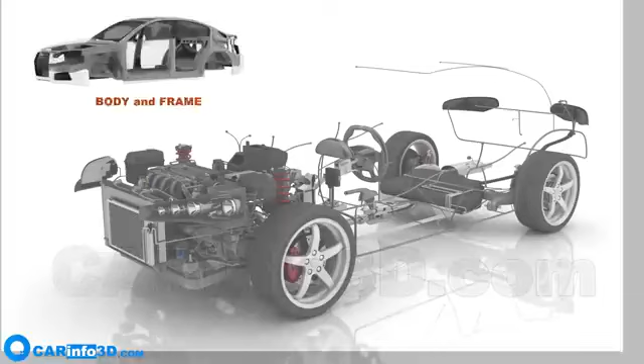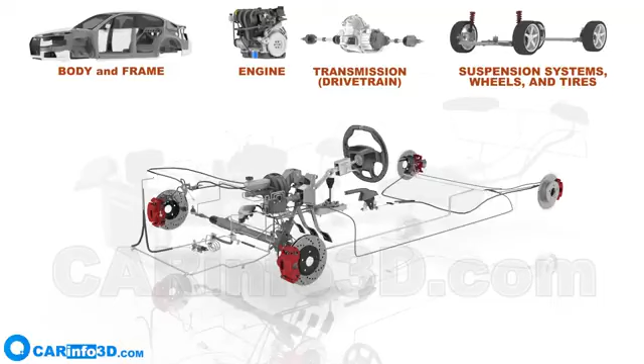In this video, we will go over the anatomy of a car. The following major systems are included in the vehicle: the body and frame, the engine, the transmission, suspension systems, wheels and tires, control systems, electrical systems. The engine subsystems and the climatic equipment are the only remaining pieces of equipment.

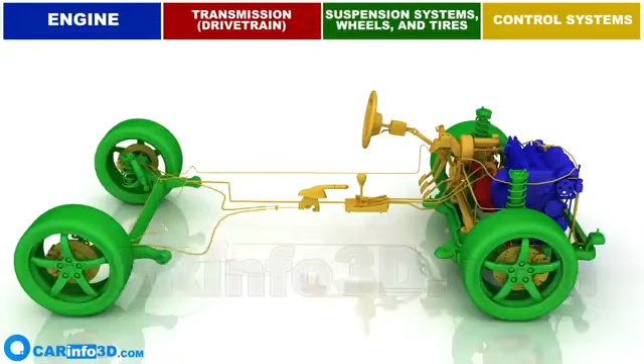Let's take a look at the car's major components and assemblies. It may appear complicated now, but we're gonna explore each system in greater detail. So, let's look at car assemblies. We'll begin with the body and frame. This is the body. It provides space for the driver, passengers, and cargo. This is the body together with all auxiliaries and decorative elements.

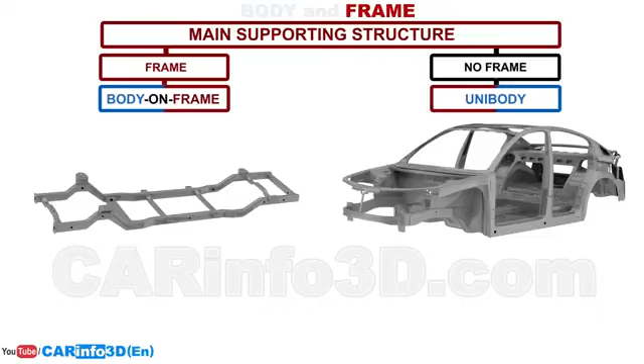Next comes the frame. It is the main supporting structure to which all other components are attached. It can be a body-on-frame or a unibody construction. The unibody combines the function of the body and the frame. Most modern cars use this type of construction. Body-on-frame vehicles are much rarer and primarily comprise off-road SUVs.

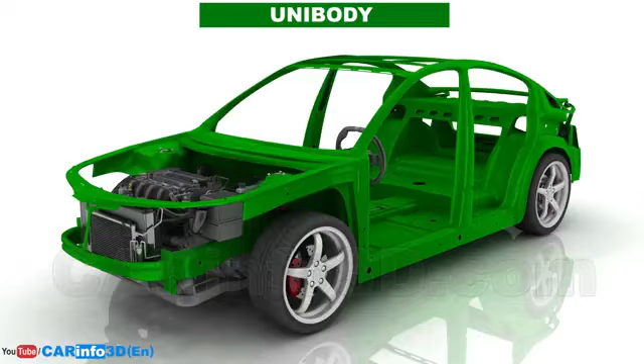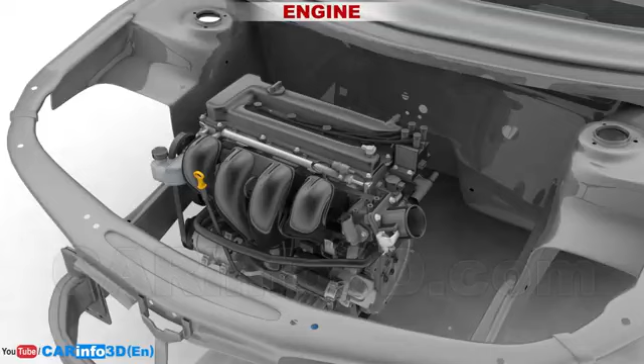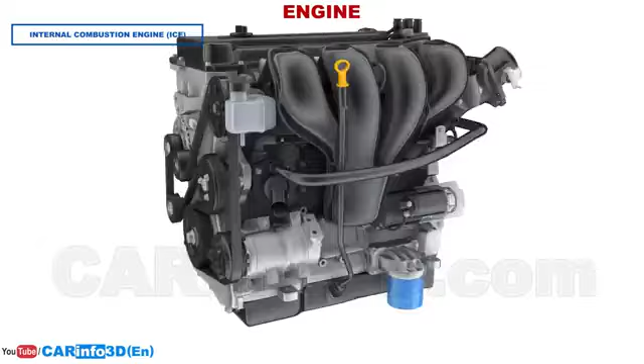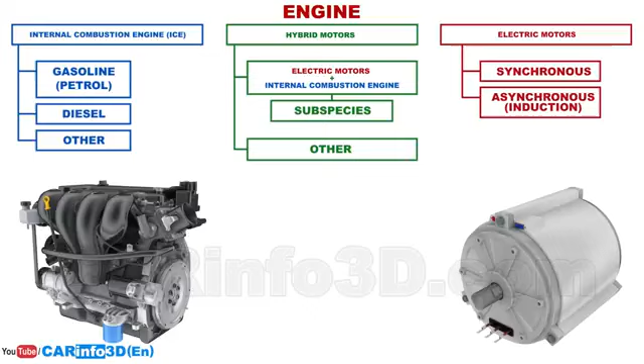The next vehicle system is the engine. The engine is usually located in the front of the vehicle. The engine converts one form of energy into mechanical energy, which is then used to propel the car. The internal combustion engine, ICE, is the most commonly used engine type in automobiles. Such engines rely on the combustion energy of gasoline, diesel fuel, or, in rare cases, another kind of fuel. Electric and hybrid motors are also becoming increasingly popular.

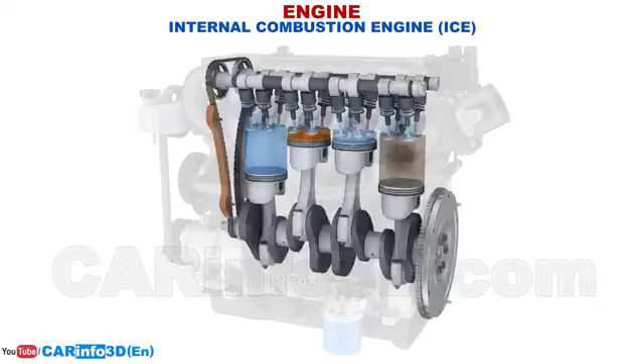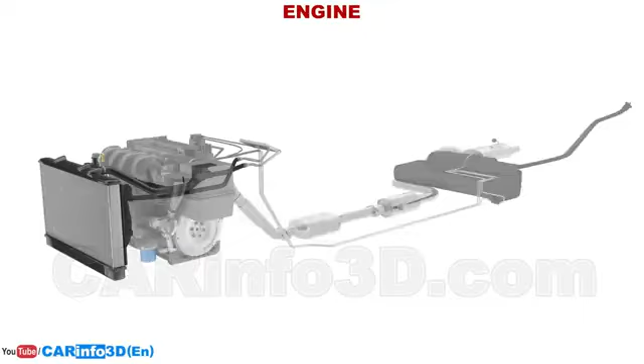You can see a 4-cylinder, 16-valve gasoline internal combustion engine. This engine's operating cycle consists of 4 strokes: intake, compression, power, exhaust. The engine has numerous subsystems such as the intake system, exhaust system, fuel supply system, cooling system, and others. The internal combustion engine generates mechanical work, and the torque is then transferred to the transmission system via a flywheel.

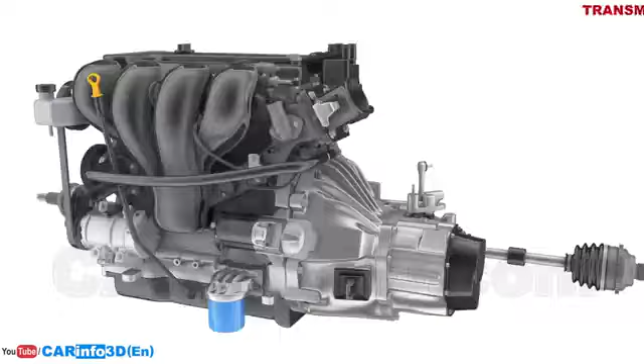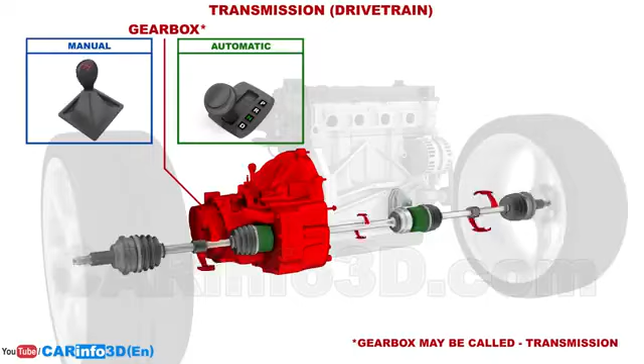The transmission is the device that connects the engine to the drive wheels. It transfers, changes, and distributes torque to the drive wheels. Transmissions are classified based on the type of gearbox. The manual gearbox requires the driver to select and change gears by using a gear shift lever and a clutch pedal. In case of the automatic gearbox, to travel forwards, the driver only needs to shift the selector into the drive mode. Further gear changes do not necessitate driver intervention.

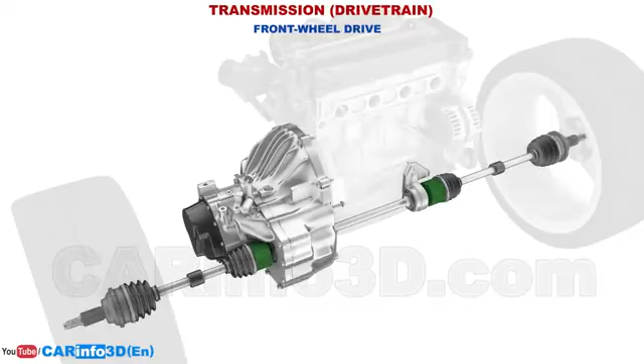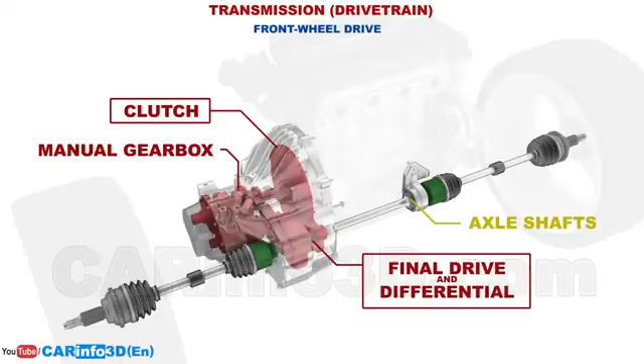The type of wheel drive is another significant distinction between transmission systems. You can now see a vehicle with front-wheel drive. Depending on the type of wheel drive, transmissions can have a variety of structures and compositions. A front-wheel drive manual transmission includes the following components: the clutch, manual gearbox, final drive and differential, and axle shafts. The clutch, final drive, and differential are all contained within the same housing as the gearbox. Now we can see how the engine and the transmission interact. The combination of the engine and the transmission system is called the powertrain.

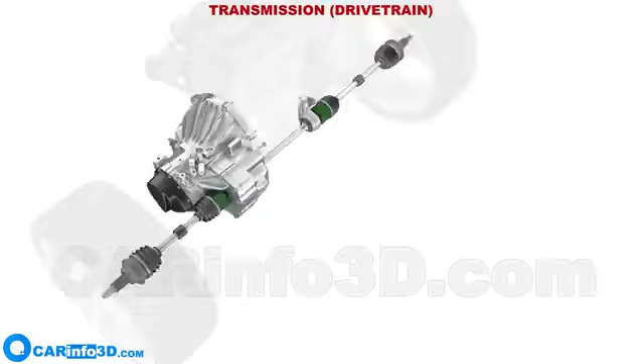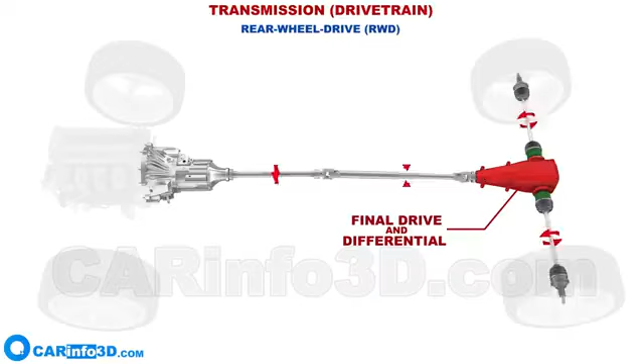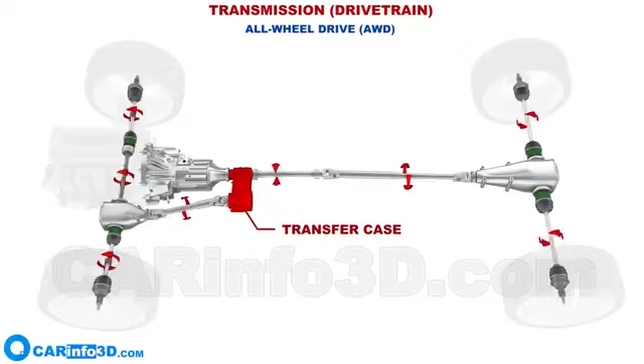Rear-wheel drive is another type of wheel drive. Such transmissions also include a propeller shaft. The final drive and differential are located on the drive axle, outside the gearbox housing. And this is an all-wheel drive transmission. In this case, torque is supplied to both axles, full-time, or on demand. Its components also include a transfer case, which can be installed in the same housing as the gearbox. The differential, final drive, and propeller shaft are duplicated on the driving axles. Let's return to the front-wheel drive transmission and move on to the next systems.

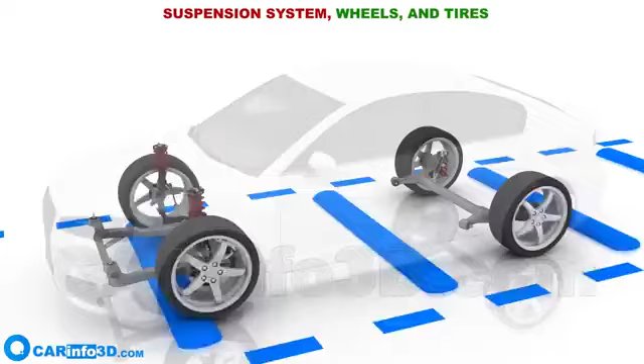The suspension system, wheels, and tires help a vehicle move along a road and receive and absorb the impact from various bumps, making driving safer and more comfortable. First, let's take a quick look at the wheels and tires. Wheels can be made from a variety of materials and in a variety of styles. They are surrounded by tires, creating an air-filled chamber. Sometimes, tires are also equipped with an inner tube. Let's go back to the suspension system.

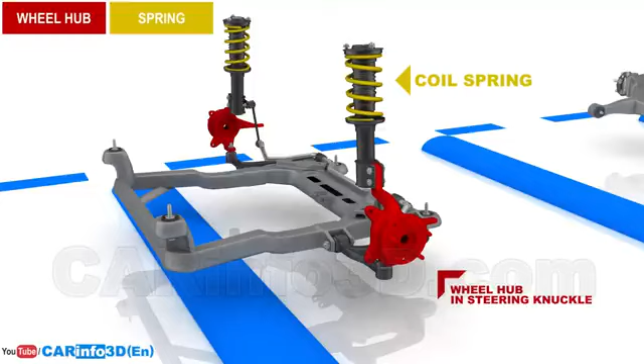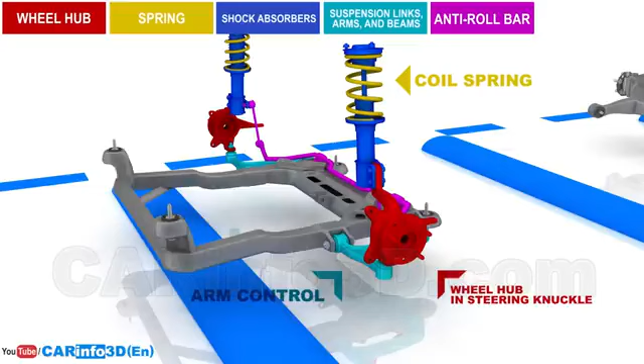The suspension includes the wheel hub. This is a wheel hub mounted on a steering knuckle. The spring, a coil spring in our case. Shock absorbers. Suspension links, arms, and beams. This type of suspension has an arm control and a shock absorber that performs an additional function of the suspension arm. The anti-roll bar. The subframe and bushings. The front bar of the suspension system uses McPherson struts, which are very popular among car manufacturers. On the rear axle, we can see a semi-independent suspension with a torsion beam.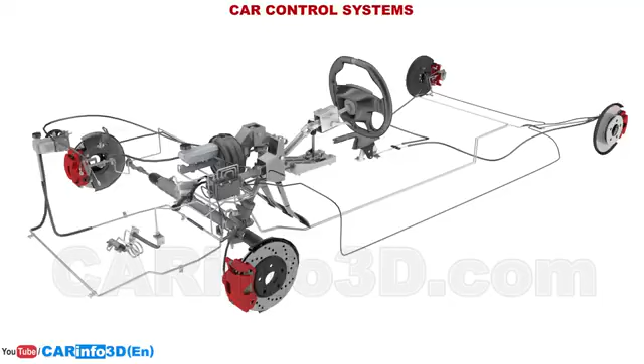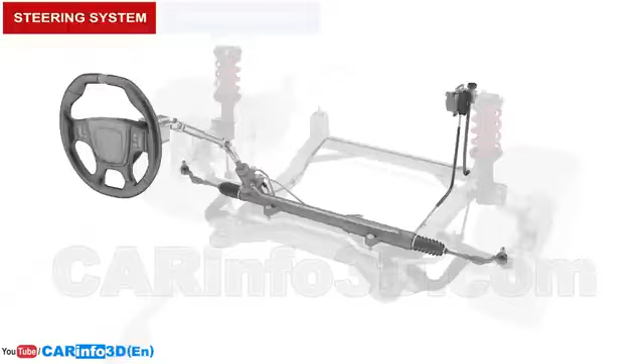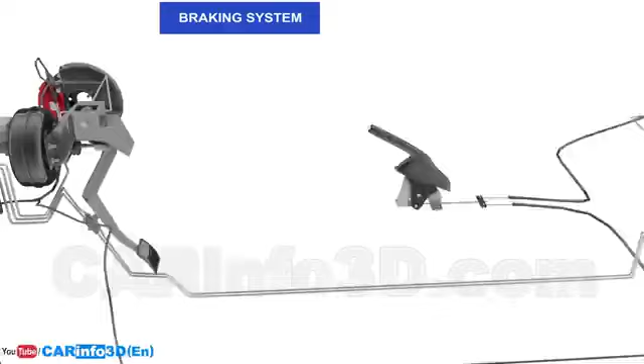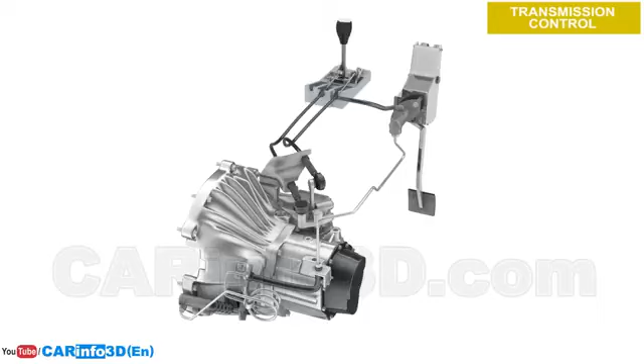Next, car control systems. They include the steering system, the braking system. In this section, it would also be appropriate to review engine and transmission controls. The steering system is required to change the direction of the car's movement. The braking system is required to slow down and stop the car, as well as to keep it in place. Engine control is used to alter the engine torque. This is an obsolete model with a mechanical throttle valve. Transmission control is required to temporarily disconnect the engine and the transmission and select the desired gear or the desired gearbox mode.

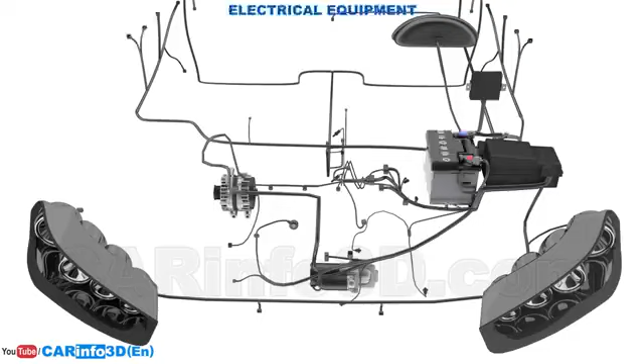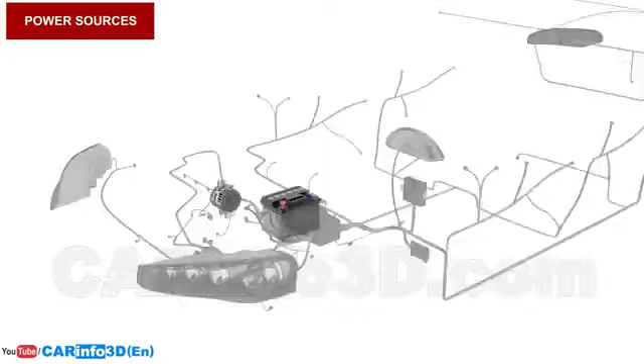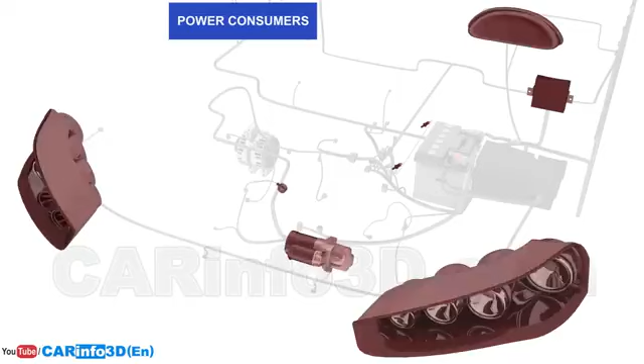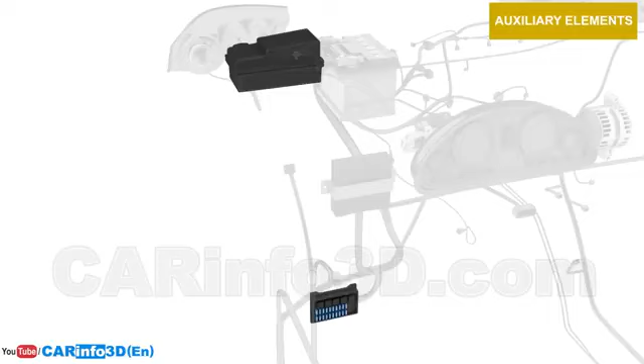Passing on to electrical equipment. Modern vehicles are inconceivable without electrical equipment. It stores, generates, transmits, and consumes electricity. Electrical equipment within a vehicle can be classified into a few categories: power sources, power consumers, electrical wiring, auxiliary elements. Power sources are the battery and the generator. Power consumers include various appliances that require electricity to operate, such as headlights, the starter motor, the engine control unit, and others. Electrical wiring connects various components of the electrical system. Auxiliary elements include relay and fuse boxes, as well as various buttons and switches.

This concludes our review of the basic car components.